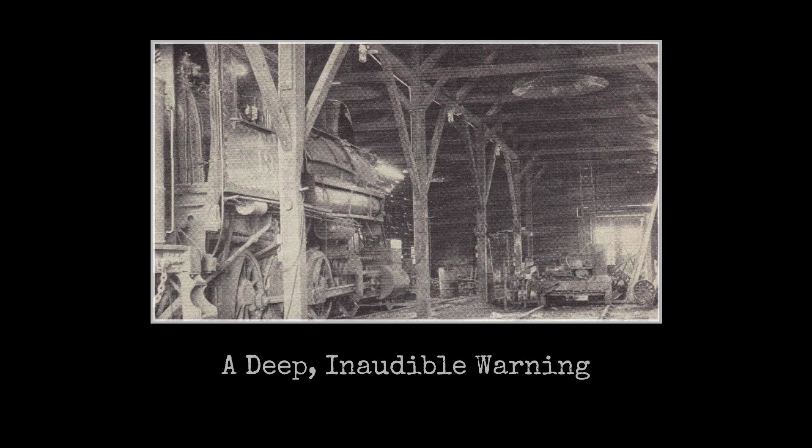The ground moved first. On Commercial Street in Boston's North End, at 20 minutes before 1 o'clock on the afternoon of January the 15th, 1919, the cobblestones shuddered with a vibration that workers at the adjacent freight house recognized not as sound but as pressure, a subsonic wave traveling through earth and timber and the soles of their boots before any human ear had time to process what was coming.

Then came the groan, low and tearing, the sound of riveted steel giving way along seams that had been silently failing for 3 years. And then the wall of the Great Molasses tank on the waterfront, 50 feet tall, 90 feet wide, holding 2.3 million gallons of warm, fermenting crude molasses at a density roughly 1.5 times that of water, simply ceased to exist. The wave that followed was not a flood, it was a physical force, dark brown and steaming faintly in the January air, moving at speeds witnesses described as faster than a running man, rising 25 feet high at the point of rupture, carrying the kinetic energy not of water, but of something heavier, denser, more relentless.

Steel sections of the tank wall became projectiles. One struck a support column of the Boston Elevated Railway with sufficient force to buckle the structure. 14,000 tons of stored liquid energy swept across Commercial Street in seconds. 21 people died, 150 more were injured. The molasses, cooling as it spread, thickened around the living and the dead alike, holding them with a grip that rescuers described as nearly impossible to break.

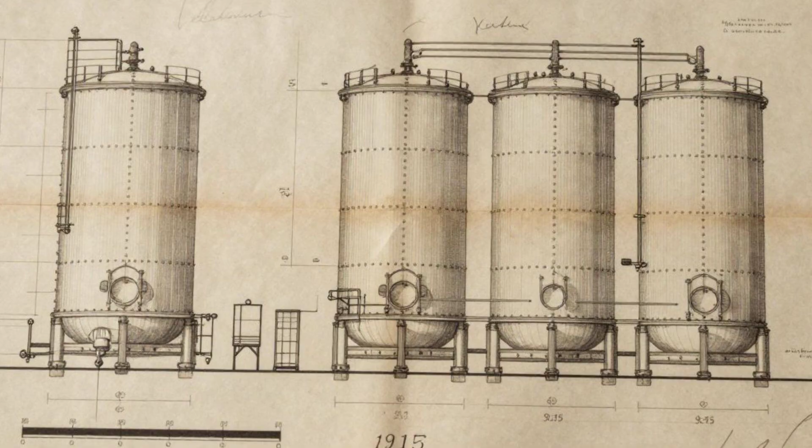To understand why this tank existed, why it was built the way it was built, and why it was certain to fail long before anyone in authority acknowledged that certainty, you have to go back to 1915, to a war economy, a prohibition deadline, and a man who signed off on a design no licensed structural engineer had ever formally reviewed. In 1915, the United States Industrial Alcohol Company, USIA, was not a manufacturer in the traditional sense.

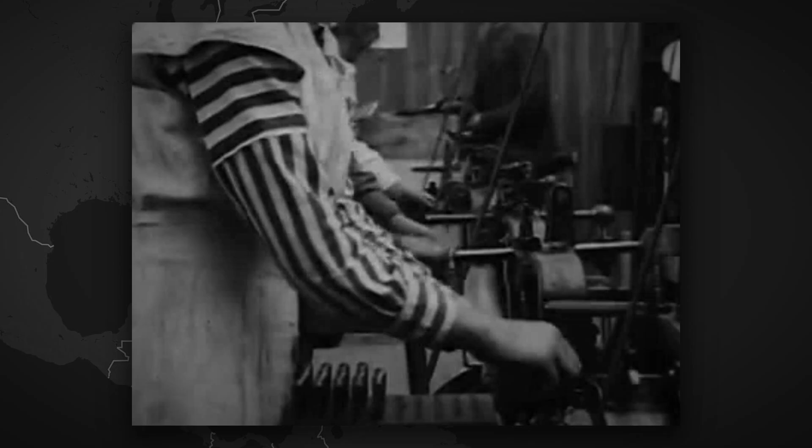It was a financial architecture built to extract profit from the gap between cheap Caribbean raw materials and wartime demand for industrial alcohol, which was essential to the production of smokeless powder, munitions lacquer, and high-grade explosives flowing to the Allied fronts in Europe. The demand was not theoretical. It was urgent, and it was enormous, and it was producing profits that made ordinary manufacturing economics look modest by comparison.

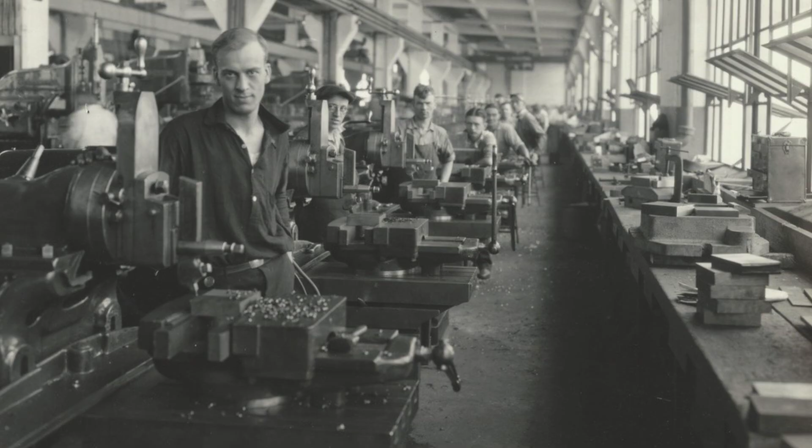Arthur Jell was USIA's treasurer, a man whose professional formation was entirely in accounting and corporate management, not in structural engineering or materials science. He was the man who decided Boston's North End waterfront would become the company's primary East Coast storage and distilling hub, and he authorized construction of the Great Tank without commissioning an independent structural engineering review.

This was not negligence born of ignorance alone. It was a decision shaped by two converging pressures, time and cost, neither of which left room for the slower disciplines of structural verification. The United States was moving toward prohibition. The trajectory of temperance legislation was visible to anyone reading the political horizon in 1915, and USIA's strategy was explicit. Stockpile as much raw molasses as possible before the distilling market was legally extinguished.

Speed mattered. Cost mattered. The tank that emerged from these priorities was contracted through a fabricator whose engineering credentials the historical record treats with persistent skepticism. It was assembled on the waterfront using steel plate that was, according to engineering testimony produced years later at civil inquest, below the yield strength specifications the structure's dimensions required. The tank was not designed with a safety factor commensurate with its scale. It was designed with a financial factor. That difference would take 3 years to collect its accounting.

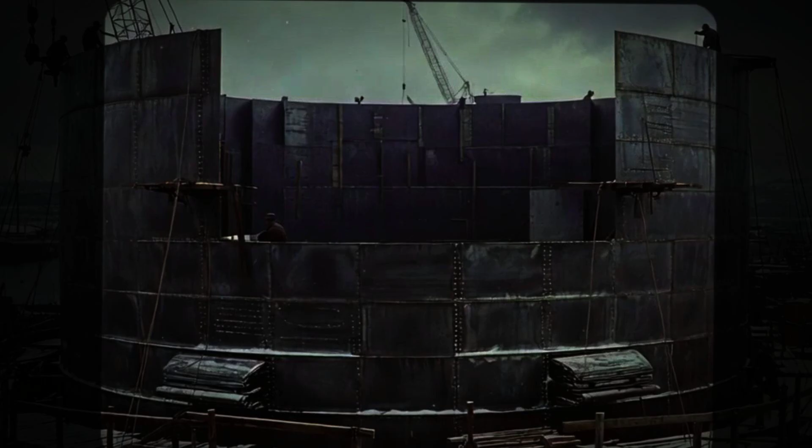The construction of the tank, undertaken in 1915 and 1916 with materials fabricated in the American Midwest and assembled on the Boston waterfront, was remarkable chiefly for what it lacked. There were no formal stress calculations filed with the city. There was no independent inspection of the steel plate before installation. There was no review of the rivet schedule against the hydrostatic load the seams would carry at full capacity.

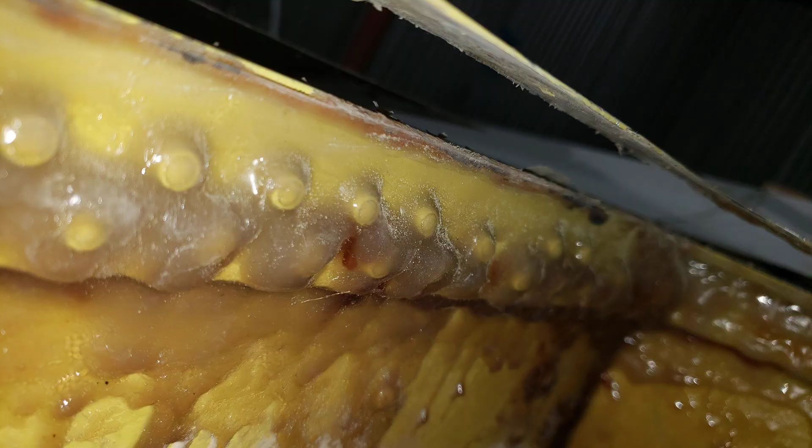The testing protocol, such as it was, consisted of filling the tank partially with water on a single occasion. That procedure could detect gross and immediate structural failure, but it could not assess cumulative fatigue, thermal cycling behavior, or the long-term integrity of riveted seams under repeated loading and pressure variation.

The rivets themselves were the structural connective tissue of the entire vessel. They were installed under field conditions that produced uneven clamping forces across the seam lines, a fact engineering witnesses would later identify as a primary contributor to the failure. No expansion joints were incorporated into the design to accommodate the thermal cycling inherent to the tank's operation.

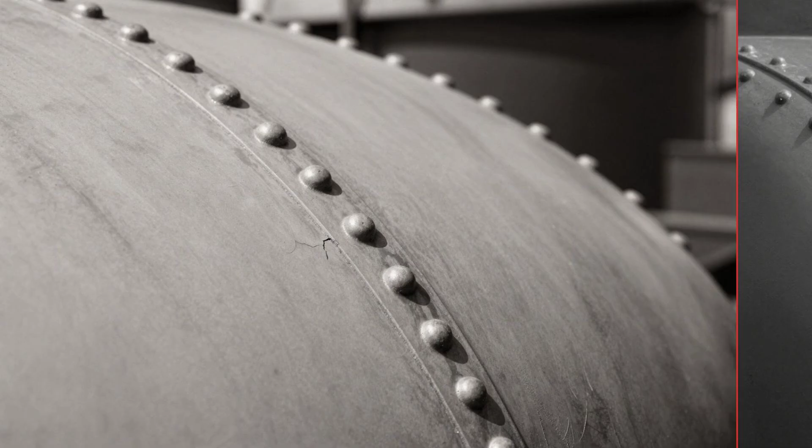Molasses arrived warm from Caribbean shipment. It cooled during storage in the Boston winter and then expanded again with the heat generated by fermentation. Each thermal cycle placed alternating tension and compression on the rivet seams, invisibly and incrementally accumulating stress damage that routine inspections were not designed to detect, because inspections that addressed structural fatigue were never planned.

The tank was built to hold. It was not built to be questioned. This is the first and central irony of the structure's existence.

USIA presented the molasses tank to the city of Boston as a passive, inert storage vessel, the safest, least dynamic piece of industrial equipment on the waterfront. It required no boiler inspection, no pressure certification, no mechanical oversight, no licensed engineer's stamp, because it was presented as just a container, a vessel, a tank.

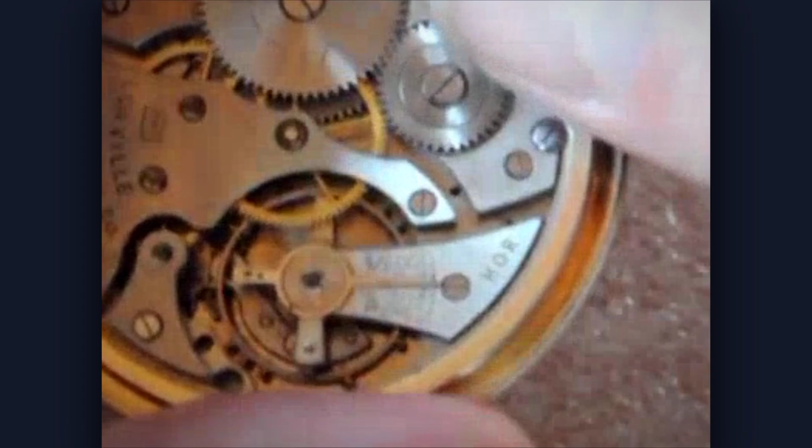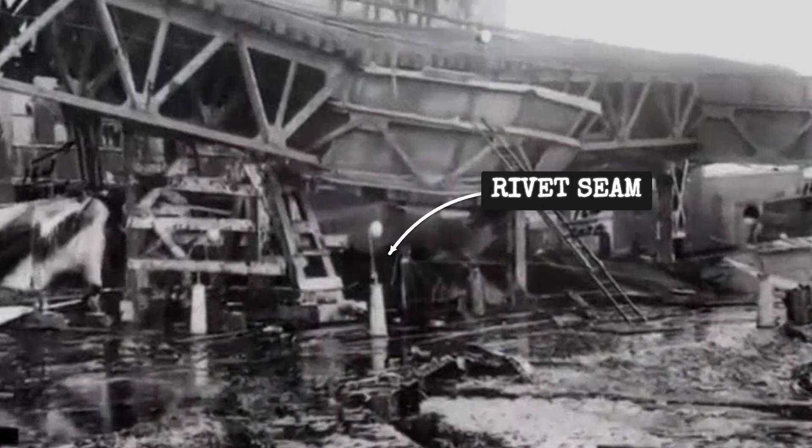Yet the tank was, in physical reality, the single largest concentration of stored gravitational and fermentation energy in the entire harbor district. It was passive in the same way a compressed spring is passive. The energy was present. It was always present. The only question was whether the material containing it would outlast the forces applied to it. The answer, accumulating invisibly in the steel's crystal structure year after year, was already being written.

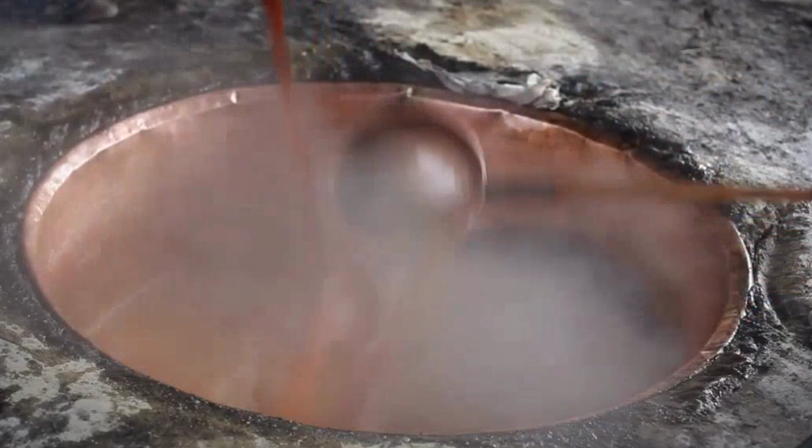The tank began leaking almost immediately after it was first filled, and this fact entered the historical record not through corporate admission, but through neighborhood observation. Children in the North End discovered they could collect molasses from the seams of the great tank by simply walking to its base and scraping the dark brown material from the riveted joints where the steel had already begun to weep under hydrostatic load. Adults in the neighborhood noted the sweetish smell that hung around the base of the structure in warmer months.

Arthur Jell's response to reports of the leaking condition, documented in corporate correspondence introduced at the 1920 civil inquest, was to order the tank painted brown to conceal the staining visible on the exterior steel. The leaks were not investigated structurally, they were camouflaged cosmetically.

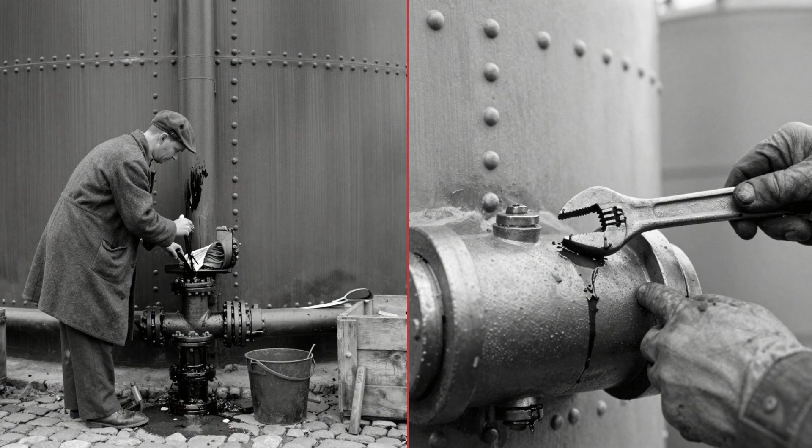No structural engineer was retained to assess what continuous seam leakage indicated about the integrity of the vessel. No inspection report was commissioned. The maintenance logic applied to the tank was the same logic a foreman might apply to a leaking pipe coupling: identify the visible symptom, apply a patch or sealant to the exterior surface, return the vessel to service, and log it as a maintenance action rather than a structural warning.

The deeper question, what does continuous seam leakage in a riveted steel vessel holding 14,000 tons of fermenting liquid indicate about the long-term structural condition of that vessel, was never formally asked, because asking it formally would have required either committing significant funds to structural remediation or removing the tank from service entirely.

And neither option was economically acceptable to a company whose entire Boston operation was premised on filling that tank as many times as possible before prohibition made filling it illegal. The years between 1916 and 1918 were years of escalating throughput and accelerating fatigue.

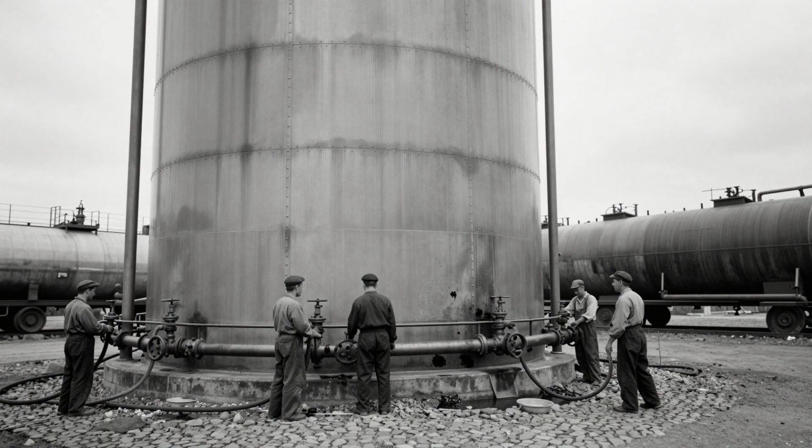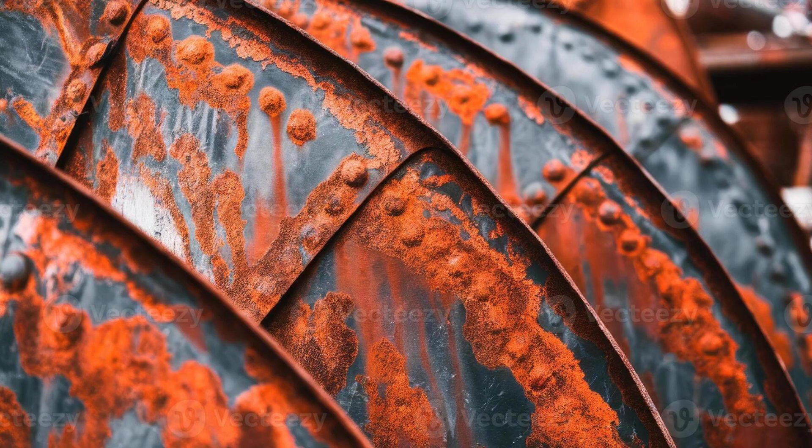The war in Europe created insatiable demand for industrial alcohol, and USIA's Boston operation ran the great tank through fill and drain cycles with increasing frequency, each cycle representing both a profitable transaction and an invisible increment of cumulative structural damage. Each cycle subjected the lower rivet seams to the full hydrostatic pressure of the molasses column at maximum fill, a pressure that the steel was already demonstrably struggling to contain, as the continued leaking made plain.

Each cycle subjected the entire structure to the thermal expansion and contraction of the contents, stressing the joints in directions for which the original fabrication had made no engineered provision. The steel plate at the base of the tank, under constant hydrostatic load from the mass of material above it, underwent slow plastic deformation in the regions between rivet lines, deformation measurable in fractions of an inch, but physically real and cumulative over dozens of fill cycles.

None of this was monitored, none of this was measured, none of this was even conceptually present in the maintenance framework USIA applied to the structure.

The tank kept standing, which USIA interpreted as confirmation that the tank was sound, that the original construction had been adequate, that the leaking seams were a minor cosmetic issue rather than a systemic indicator. This is the logic of normalization, the substitution of continued operation for structural verification, the replacement of engineering assessment with the empirical observation that nothing catastrophic has yet occurred.

In the vocabulary of industrial failure analysis, it is one of the most reliable precursors to catastrophic collapse. The tank did not need to exhibit dramatic distress to be in serious structural jeopardy.

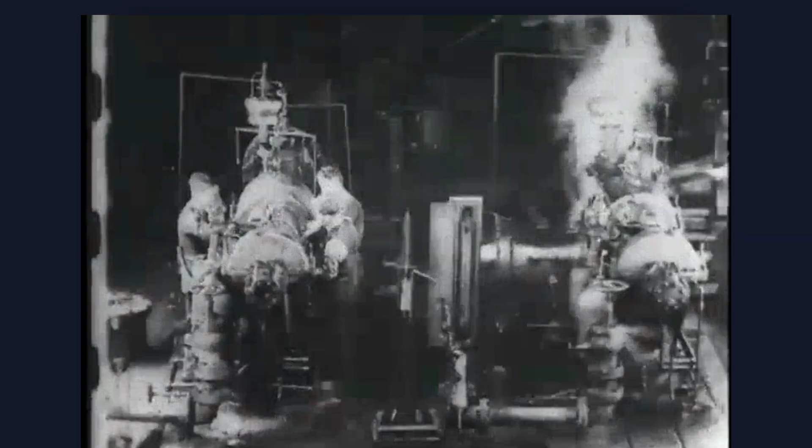It needed only to be asked the right questions by someone with the authority and the instruments to answer them. No one asked. No one had been given the mandate to ask. That was not an accident.

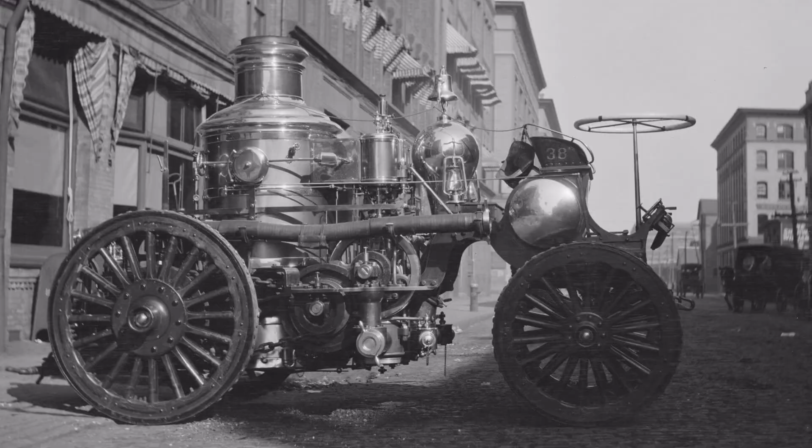By the winter of 1918, the North End had organized itself around the tank's presence with the thoroughness of a neighborhood that had absorbed an industrial intrusion into its daily geography, and no longer perceived it as exceptional. The Boston Elevated Railway ran its steel columns and elevated trackway within a few dozen yards of the tank's base, carrying thousands of commuters daily past a structure whose structural condition no city inspector had formally assessed since its construction. Engine Company 31 of the Boston Fire Department operated from a firehouse roughly 50 yards from the tank's southern wall, their crews walking past the great steel cylinder on every shift, its brown-painted exterior giving no indication of the deteriorating condition of the joints beneath the paint.

Freight rail lines serving the harbor ran directly adjacent to the tank's foundation piling. Wooden tenement buildings occupied the blocks immediately north and west, their residents going about daily life within the structure's failure radius. The tank was not isolated from the city. It was embedded in it, a massive vessel of stored energy positioned at the center of a dense urban web of infrastructure and habitation, its potential failure radius overlapping with every surrounding structure, every surrounding life, every element of the neighborhood's physical and economic fabric.

The Sanborn fire insurance maps of the period recorded the tank's position relative to neighboring structures with cartographic precision, but insurance logic in this era was calibrated to assess fire risk, not structural collapse risk. The maps documented the neighborhood's vulnerability without naming what was vulnerable. The tank was visible on every map. Its danger was invisible on all of them.

The final sequence of loading began on January 13th, 1919, when a cargo ship from Puerto Rico delivered a fresh consignment of molasses to the Commercial Street facility, raising the tank's fill level to near capacity. The temperature in Boston that week had fallen to approximately 2 degrees Fahrenheit in the days preceding the delivery, then climbed sharply as a weather system moved through, a temperature swing of nearly 40 degrees within the 24 hours immediately preceding the collapse.

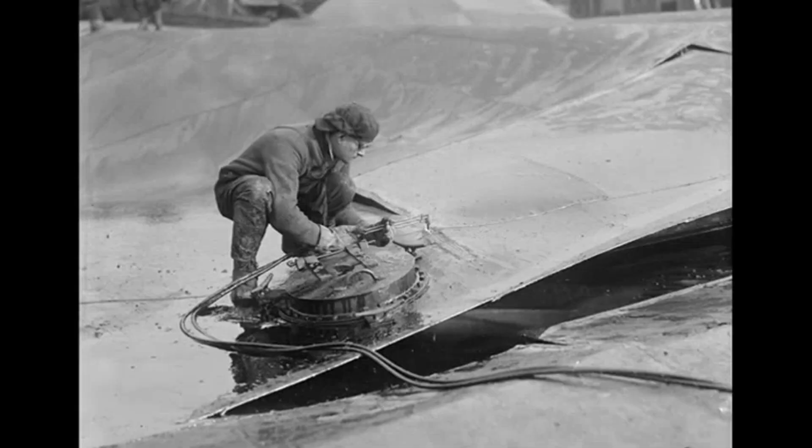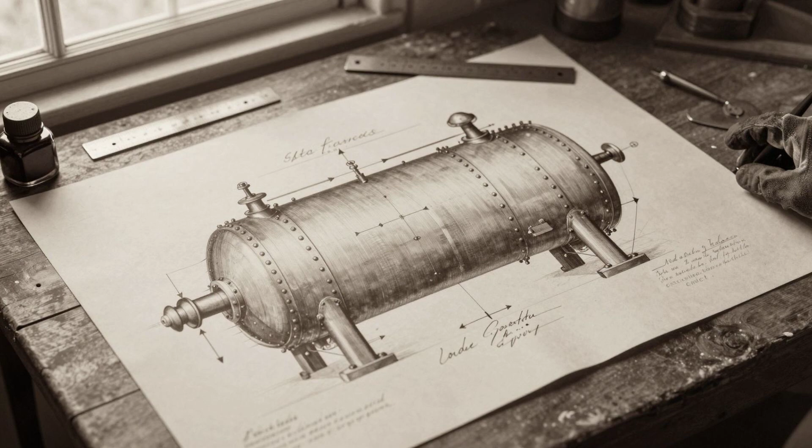Warm molasses expansion in a vessel whose walls have no provision for volumetric change generates pressure against those walls. Fermenting molasses, which the material in the tank was actively doing, generates carbon dioxide as a byproduct of ongoing microbial activity, adding gas pressure to the already elevated hydrostatic load from the liquid column.

The riveted steel walls of the tank, already compromised along the seam lines by 3 years of fatigue cycling, repeated thermal stress, and cosmetically managed leakage, were now carrying a combined load that had never been formally calculated against the actual yield strength of the steel installed. The hydrostatic pressure from the full column of dense molasses, the gas pressure from active fermentation, and the thermal expansion stress from the rapid temperature rise converged on the rivet seams simultaneously.

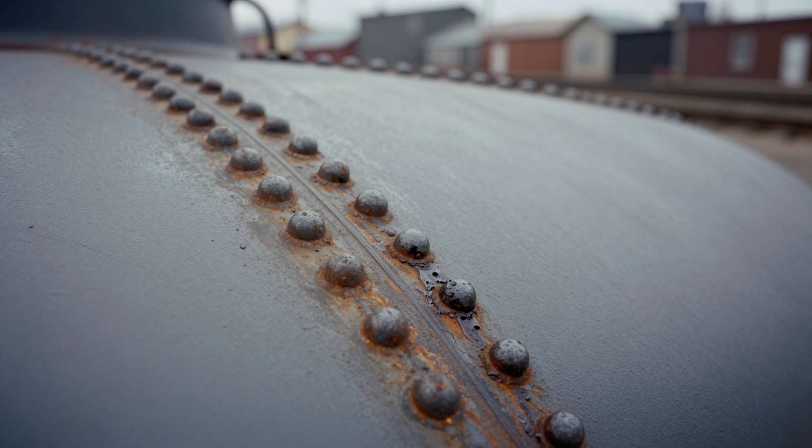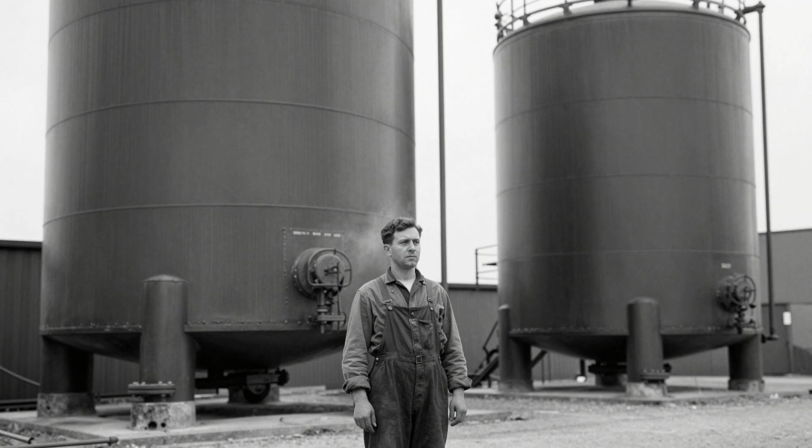Workers near the tank in the days before the failure reported sounds from the structure, groaning, creaking, low metallic complaints that they had learned through 3 years of familiarity to classify as normal operational noise. The tank had always made sounds. The sounds had never preceded catastrophe before. That history of no consequence was the last cognitive barrier between the workers and the recognition of immediate danger, and it held until it was irrelevant.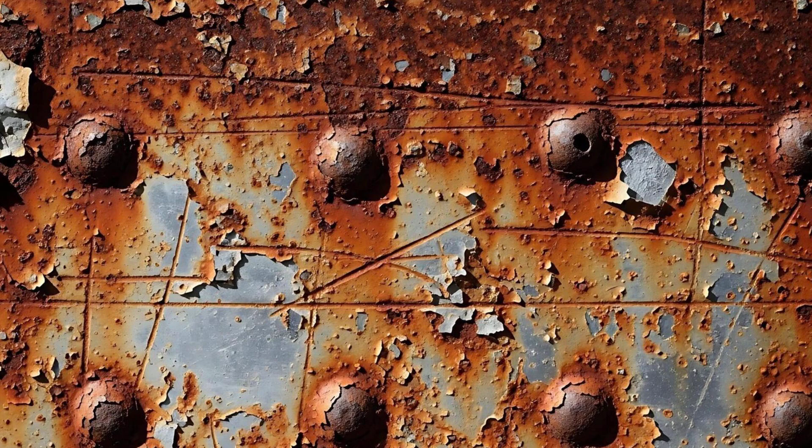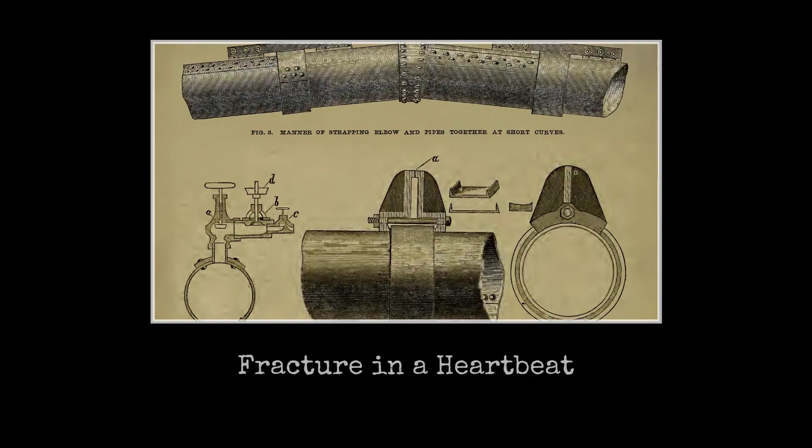At 12:40 in the afternoon on January 15th, 1919, the lower rivet seam on the south face of the tank failed in a propagating fracture that the physical evidence later indicated ran the length of the seam in a fraction of a second. The mechanics of riveted steel failure under hydrostatic overpressure are unforgiving in their speed. The material holds and holds and holds at the elastic limit, and then the crack initiates at the weakest point in the seam, likely a rivet hole where stress concentration had been highest throughout the vessel's operational life, and the fracture runs.

Two large sections of the tank's steel skin were propelled outward as ballistic projectiles by the pressure differential between the interior and the outside air. One section, carrying the momentum of tons of steel plate, accelerated by millions of pounds of hydrostatic force, struck a support column of the Boston Elevated Railway with enough force to crack the column and derail a freight car on the elevated structure above.

Other steel fragments were reported by witnesses to have been thrown hundreds of feet across Commercial Street and into adjacent structures, embedding in walls and punching through wooden building facades.

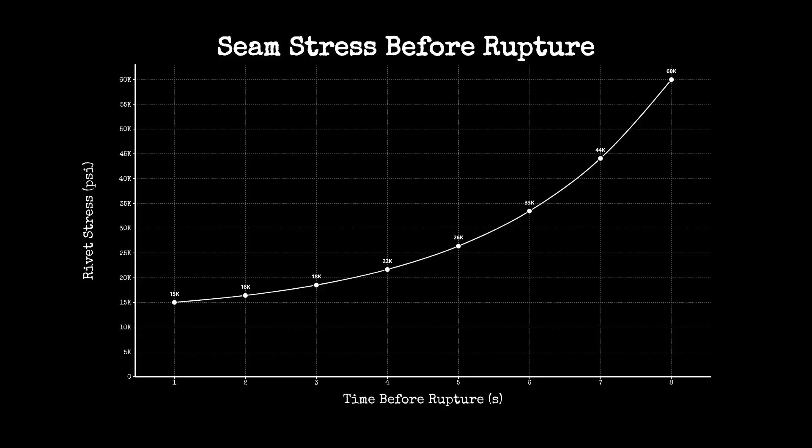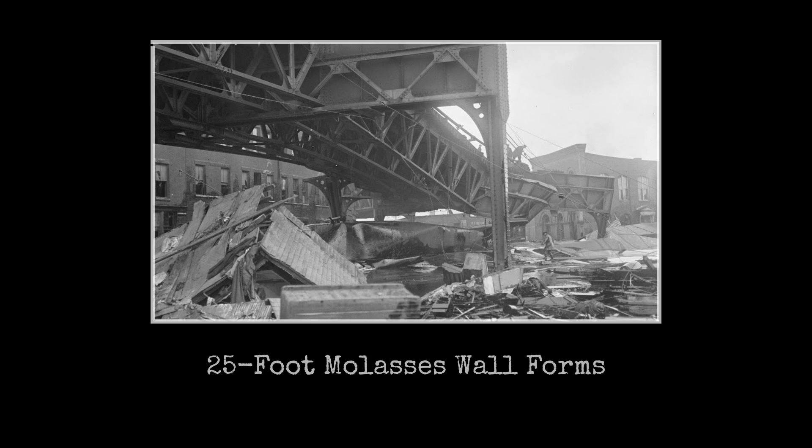The molasses wave that followed the wall's disappearance was the release of 14,000 tons of dense liquid from a height of 50 feet, and it behaved not like a water wave, but like something heavier and more viscous and more final. Reports from the scene recorded the wave height at 25 feet near the point of rupture, with the wave maintaining height and energy as it crossed Commercial Street and struck the surrounding buildings with a force that witnesses later described as physically incomprehensible. The firehouse of Engine Company 31 was engulfed.

The freight house was swept. Workers on the freight rail line were carried from their positions and deposited against structures 50 feet and 100 feet from where they had been standing. The molasses reached the support columns of the elevated railway, coated the cobblestones to a depth that trapped horses in place and overturned automobiles, and forced its way through every opening in the ground floor facades of surrounding buildings.

21 people died. Among the dead were laborers working the freight yard at the moment of failure, a firefighter caught in the structural damage to the firehouse, and residents of the surrounding blocks who were simply present in the geography of the tank's failure radius on that afternoon and had no reason to be anywhere else.

150 people were injured. The molasses, surrendering its warmth rapidly to the January air, thickened as it spread, transitioning from a wave into a medium of obstruction that rescue workers had no equipment or protocol to address. Horses could not be freed by pulling, bodies could not be reached by wading. The material had trapped the living alongside the dead in a substance that did not yield to ordinary physical intervention, and the rescuers who entered it found themselves slowing, their own movements impeded by the same viscosity that was killing the people they had come to save.

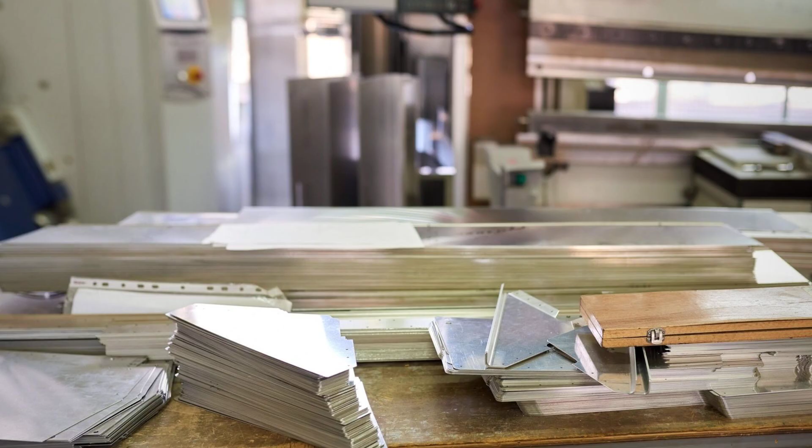That defense collapsed entirely under the weight of the metallurgical and structural evidence. Fracture patterns in recovered steel sections were inconsistent with explosive overpressure and consistent with ductile overload failure at the rivet seams. The bomb theory was not a mistaken engineering hypothesis arrived at in good faith. It was a litigation strategy designed to shift liability to an unidentifiable party. It did not survive scrutiny.

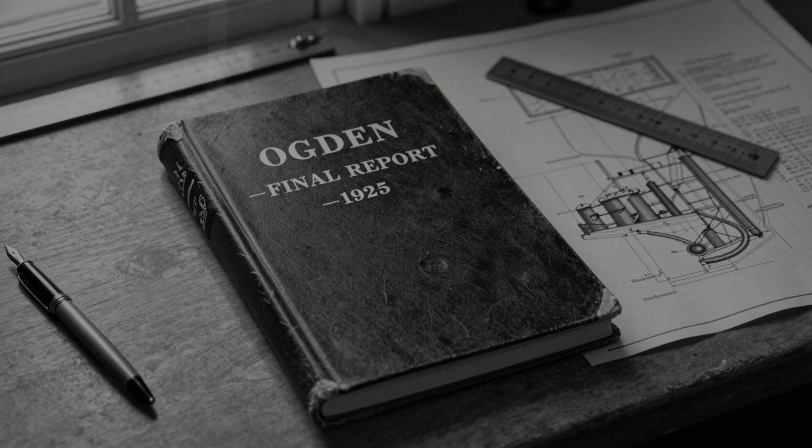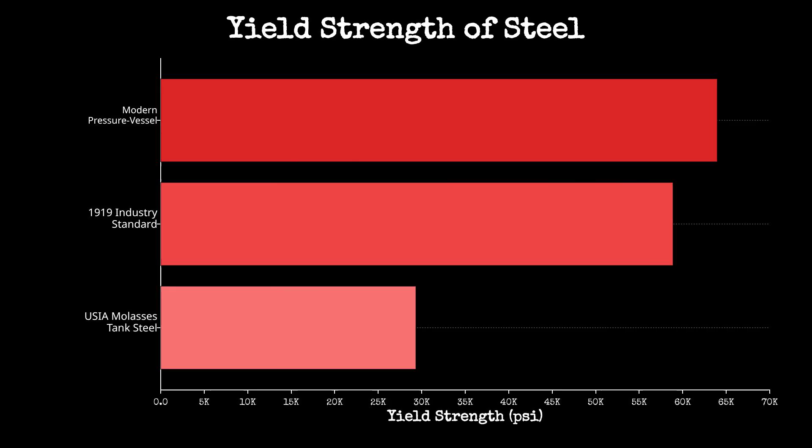Ogden's final report, issued in 1925, was a document of forensic precision and institutional clarity. It found that the steel used in the tank's construction was substandard relative to the structural demands the vessel's dimensions imposed on it. It found that the construction process had been defective in ways that compromised the structural integrity of the rivet seams from the first filling.

It found that USIA's management had possessed knowledge of the tank's leaking condition over a period of years, and had responded to that knowledge with cosmetic concealment rather than structural remediation. It assigned liability to the company without equivocation. The settlement that followed, $628,000 distributed among the plaintiffs, closed the legal chapter of the disaster after 6 years of proceedings.

The report was, by any measure available in 1925, a thorough and honest accounting of how the tank had been built, how it had been operated, and how it had failed. It named the failure mode.

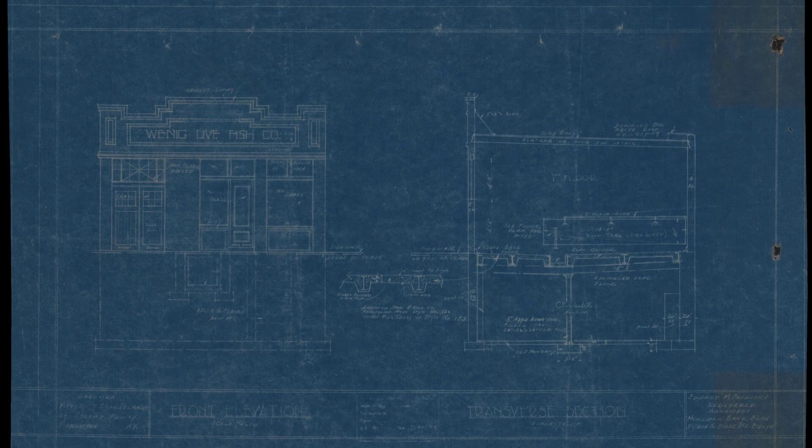It traced the failure mode to its origin in the construction decisions of 1915 and 1916, connecting that origin to the institutional logic that had governed the tank's operation through three years of visible warning signs. It was a complete picture of industrial catastrophe, documented with evidentiary rigor.

And then the engineering profession and the regulatory bodies of the Commonwealth of Massachusetts did something that the report's thoroughness made conspicuous by contrast. They changed almost nothing that mattered structurally.

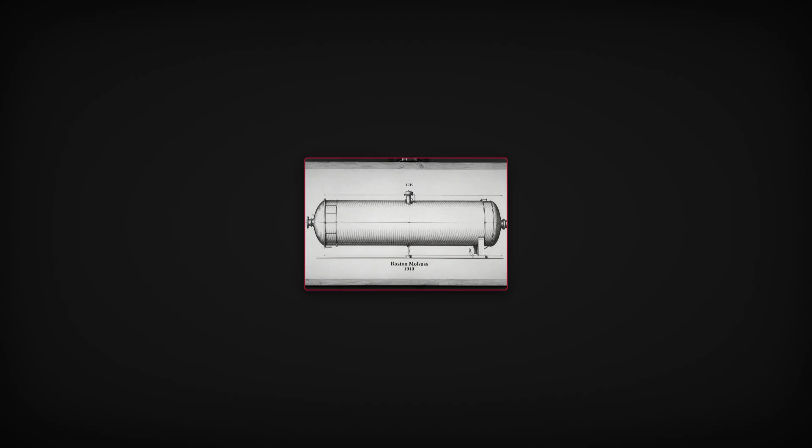No new mandatory construction standard for large industrial liquid storage tanks was enacted as a direct legislative consequence of the Boston disaster. The Massachusetts Board of Boiler Rules expanded its inspection authority in the years that followed, but the specific category of large, unpressurized or low-pressure liquid storage vessels, the precise category the molasses tank had occupied, remained outside comprehensive mandatory inspection frameworks for years.

The machine had been measured, analyzed, and documented with extraordinary care. The system that produced the machine, the permitting culture, the absence of independent structural review requirements, the institutional normalization of visible failure signals, had been identified clearly in Ogden's report and adjusted only at the edges. They proved exactly how it failed, but they changed almost nothing.

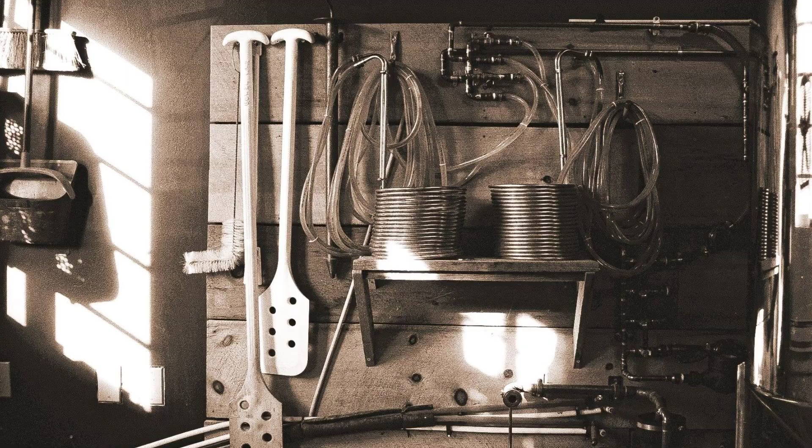The forces that ultimately removed large molasses storage tanks from the Boston waterfront were not safety regulations produced by the disaster's investigation. They were the 18th Amendment and the economics of its consequences. Prohibition took effect in January 1920 and destroyed the industrial alcohol distilling market for which USIA's entire Boston operation had been constructed. The economic logic that had driven Arthur Jell in 1915 to commission a tank of maximum scale without adequate engineering review,

the logic of filling the vessel as many times as possible before the legal window closed, was now permanently irrelevant because the legal window had closed and taken the market with it. USIA's Boston distilling operation wound down. The site on Commercial Street was cleared. The regulatory evolution that proceeded through the 1920s and the 1930s in pressure vessel engineering, driven by the accumulated record

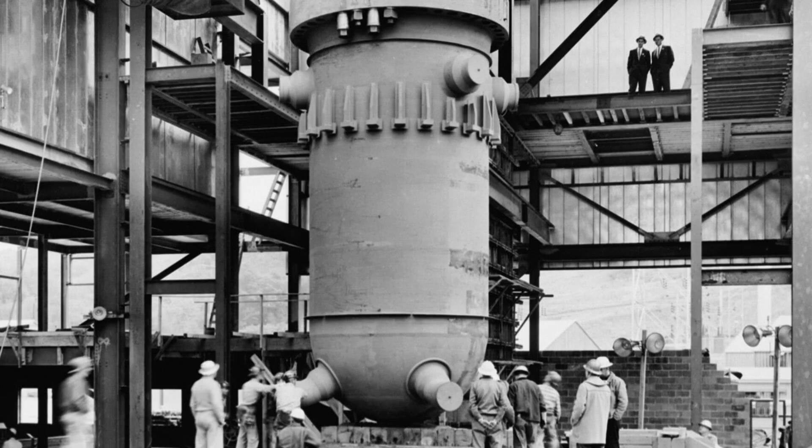of industrial failures across multiple industries and multiple decades, gradually produced improved standards for storage vessel construction and inspection. The specific institutional response to Boston was absorbed into this broader evolution rather than driving it.

The repeal of prohibition in 1933 restored legal distilling, but the industrial ecology that had produced the Commercial Street tank, the combination of wartime urgency, maximum scale storage economics, minimum engineering oversight culture, and a waterfront embedded in a dense urban neighborhood, never reassembled in the same configuration.

The site on Commercial Street today carries no visible evidence of what it once held. A small park occupies part of the ground where the tank stood. A parking area covers adjacent sections. A historical marker acknowledges the disaster in the compressed civic language of public commemoration.

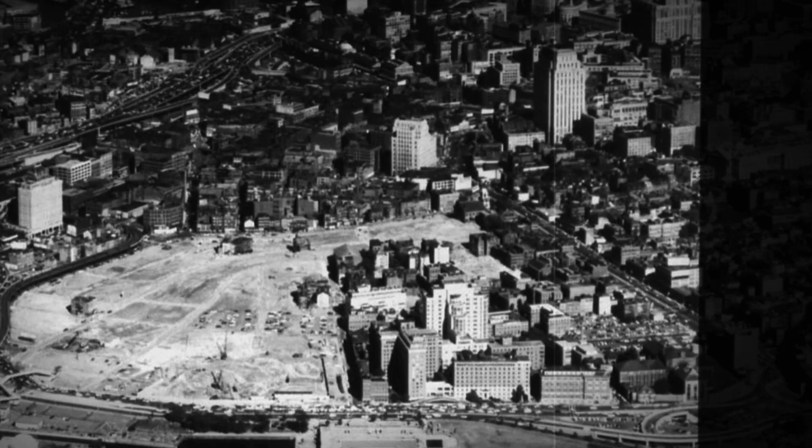The Boston Elevated Railway that the tank's debris struck was demolished decades ago, its elevated structure removed as the city rebuilt its transit infrastructure. Engine Company 31 operates from a different location in the North End. The foundation pilings of the great tank remain underground, documented in historical surveys, invisible from the street.

On cold January afternoons, when the temperature approximates the conditions of that final morning and the harbor wind carries the particular clarity of a New England winter, there is nothing on the surface of the earth at Commercial Street to indicate that this ordinary urban ground was once the floor of a catastrophe.

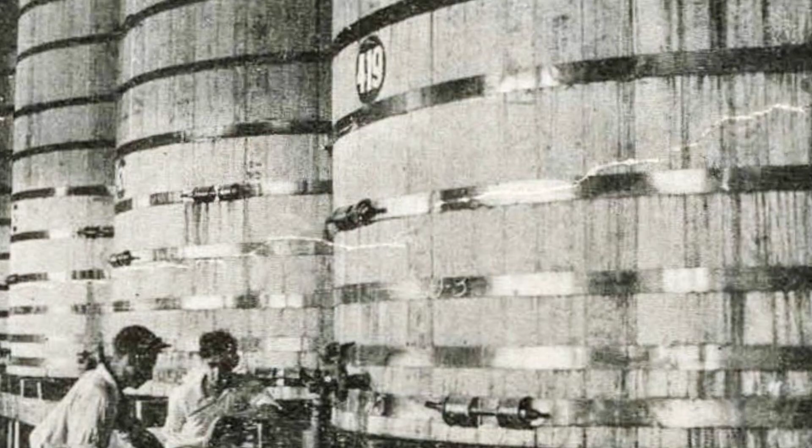The subsonic vibration through the cobblestones is gone. The low metallic groan of steel under hydrostatic load is gone. The smell of warm fermenting molasses hanging over the harbor is gone.

The tank that held 12,000 tons of stored energy was approved by a treasurer rather than an engineer. It leaked for three years while its owners painted over the evidence and called the leaking normal. It was filled to capacity on a warming January morning with no one in authority equipped to recognize that the loading conditions had finally and fatally aligned.

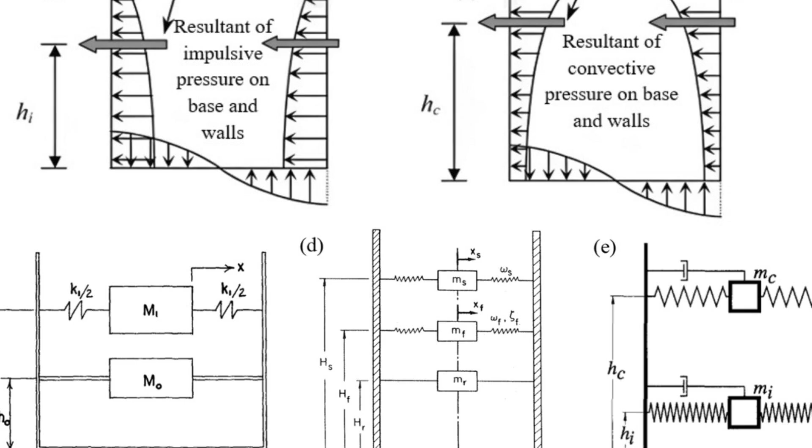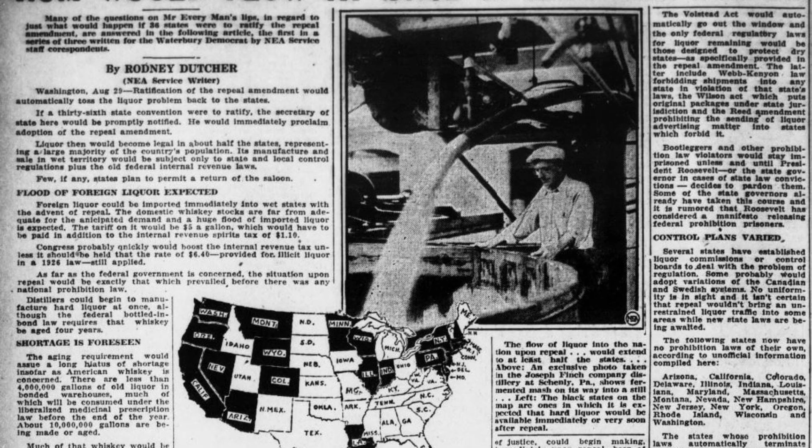That tank does not exist. It was never rebuilt in a better engineered form. It was never replaced with a successor design that incorporated the lessons of its failure. The industrial logic that created it was made obsolete first by law and then by economics. What replaced it on the waterfront was not a safer version of the same machine, but simply the absence of the machine entirely. The most dangerous structure on the Boston waterfront was not retired by engineering reform or regulatory mandate.

It was removed by history. The silence it left behind, on the ground, in the harbor, in the air over the North End on a cold January afternoon, is absolute and permanent. The machine that stored more energy than anyone had calculated is simply and quietly gone.